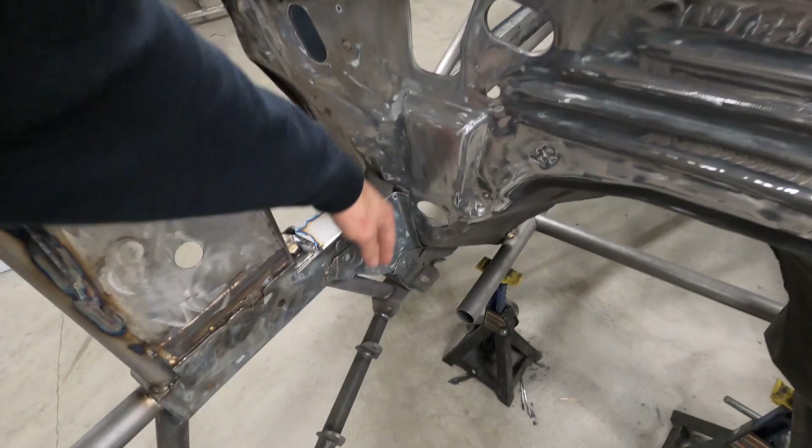I gotta do a couple things beforehand. There's a few spots I gotta weld, and then there's a couple holes that I want to fill, like this one, because the motor plate mount is actually going to sit right here. So I want to fill that so I'm not struggling later.

And then I'm going to worry about the rest of the firewall later. There's a lot of patch panels that need made. Like, we're not using this.

So got a little bit to go on that, but I'm gonna bust this out real quick, and then we will go ahead and get the rear end, make sure it's aligned, make sure it's straight in the car. We kind of did that when we did the 4-link bars, but the car's been moved and it doesn't have a wishbone in it, so the rear end kind of floats around a little bit.

So I'm gonna put the rear end on jack stands so it doesn't move around. I would build a wishbone, but I don't have the Heims for the end. They've been on a couple week back order, so kind of waiting on those. But everything else for a wishbone's here, I just don't have those.

So I'm going to get started on this, and then once I get to the point of getting the rear end lined up, motor plate set, I will start filming more and show you guys what goes into getting the motor set and moving the motor where we want it for what we're gonna do.

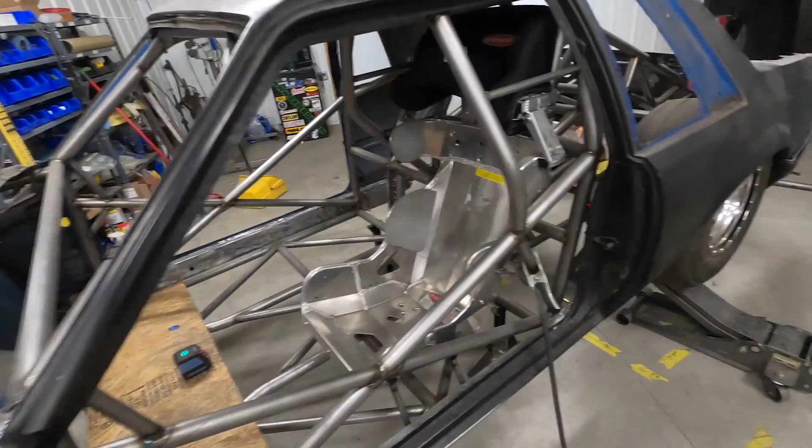It's super time consuming because it is 4 o'clock right now and I haven't even started on the motor plate. So that goes to show you, I didn't really take any breaks. It just takes a long time to fit each little individual piece.

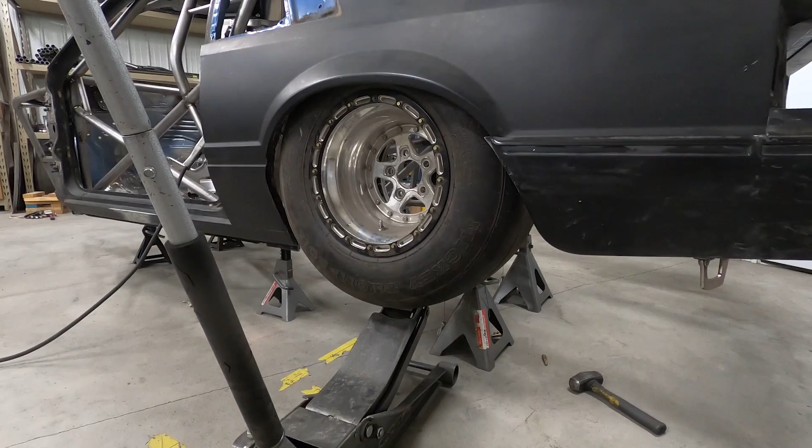So finally got around to the back here. I wanted to make sure the ride height is where I wanted it, and this is kind of what I'm looking at running. To set the motor plates, I need to know ride height.

Like I said, on the jig, this is a lot easier because we can just set the tire on the jig and it's done. But I'm using a jack because I just wanted to see what the ride height is.

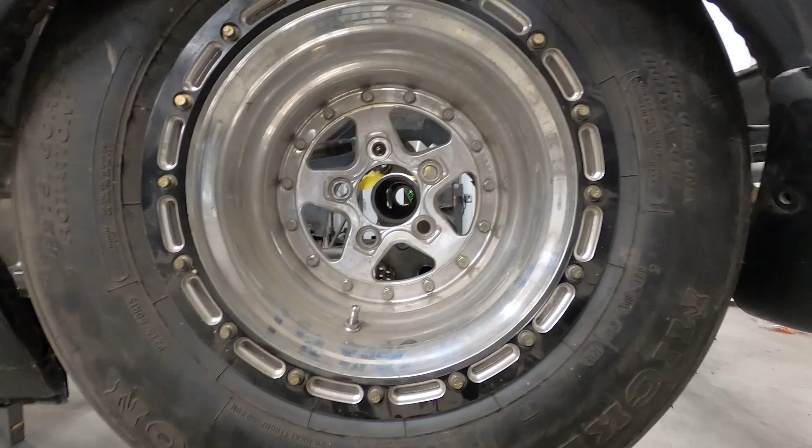So I got the rear end pretty much level. I'm not really worried about side to side, I'll do that here in a minute, but I got this somewhat in line with the axle tubes. So I think that's the ride height we're going to set the motor plates at, that way we can get those set where we need to.

So I'm going to get the rear end kind of realigned because it's just kind of floating there. As you can tell, it's a little off. I don't have this thing perfectly.

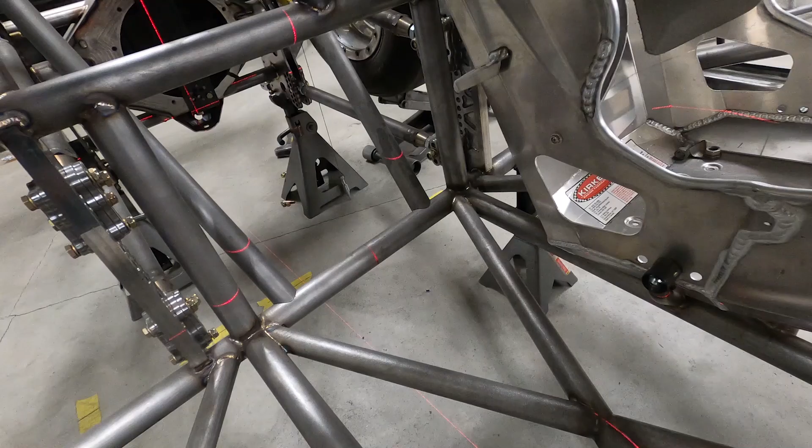If you guys are looking for a good laser, we kind of tried an Amazon laser, and it turned out pretty well. I think this thing's like $35, and it has worked phenomenal. We were going to buy a more expensive one, but said hell with it and bought a $35 one, and it is pretty badass. So it's a little tip of the day.

So I'm gonna get that aligned, and then I'll show you what we use to align the motor plates and all that fun stuff here in a minute.

All right, so got the laser set up. I made reference marks way long ago when we actually built the chassis, so they're still on there. Got that one lined up, and then I have one back there, and one on this cross X right here. So I got the rear end basically right where pinion center is.

So I will go ahead and, I'm probably gonna set pinion angle. Either I'm gonna set pinion angle or I'm gonna take off at least the upper 4-link bars. That way I can let the rear end pivot, because I'm about to show you what we use.

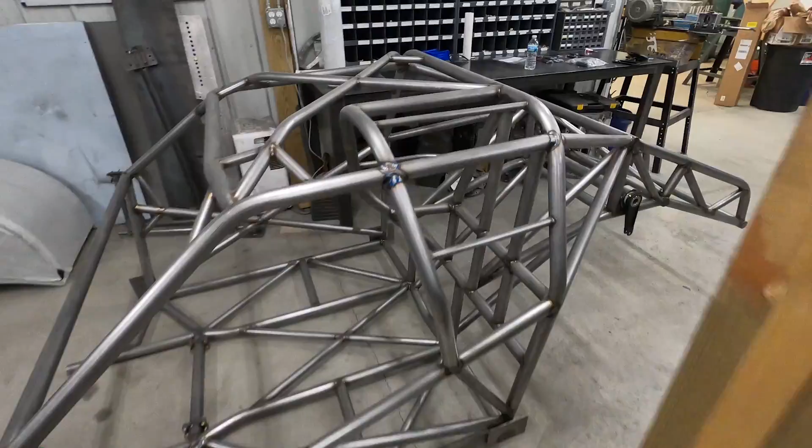So obviously it's an LS motor going in here. We have mock-up blocks over here. I gotta dig them out. So this is all of our mock-up bolt stuff.

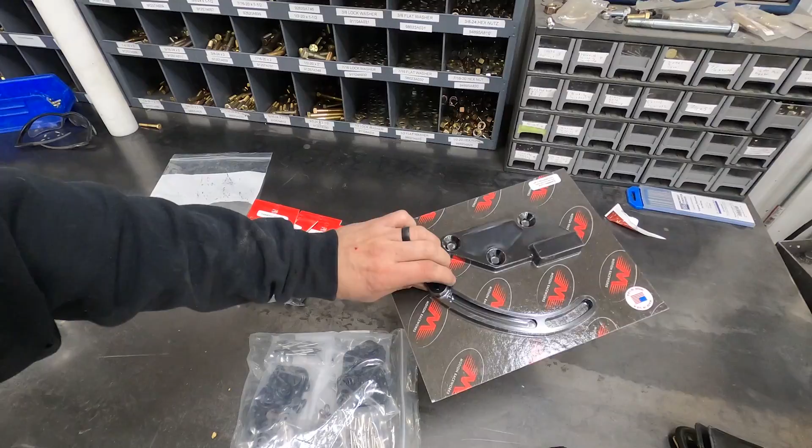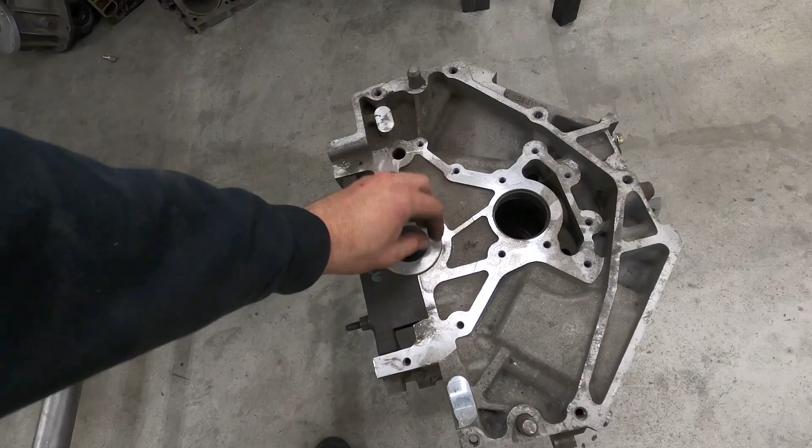So here is our mock-up blocks, and we use aluminum blocks because this is why. We can drag them, lift them. We don't have to throw our backs out lifting an iron block. I had these made a long time ago. I think they're sized to the mains outer diameter, and the inside is actually 1 5/8 inch. So what we do is go over to our tubing and get a piece long enough.

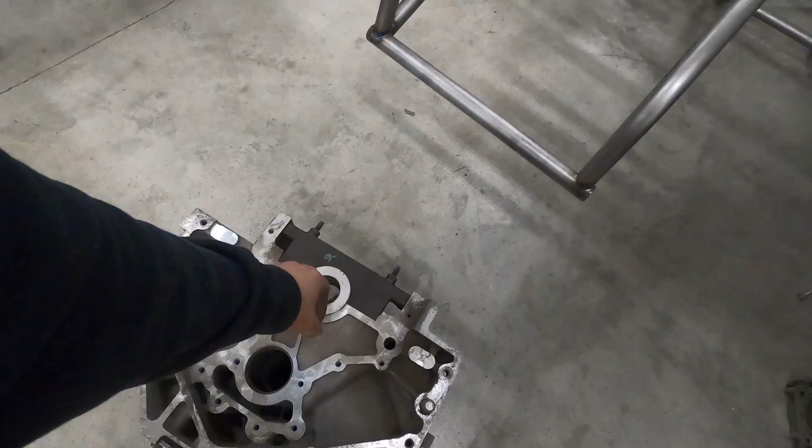To run from the mains of the motor all the way to the rear end. So we'll get a 1 5/8 inch piece and run that all the way through here, and it ends up in our 9-inch third member.

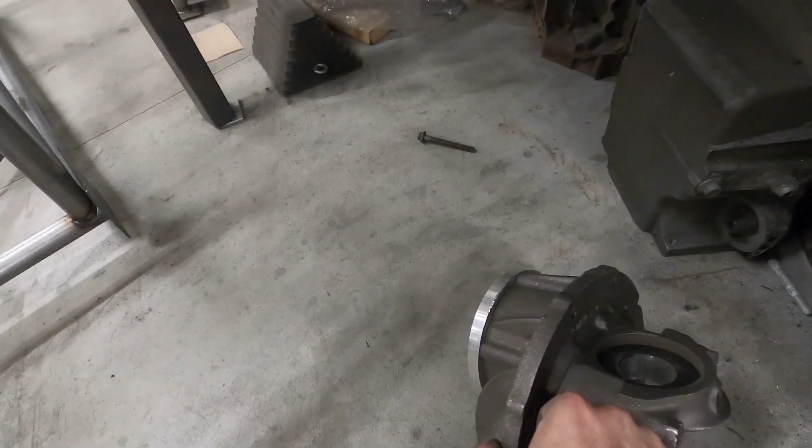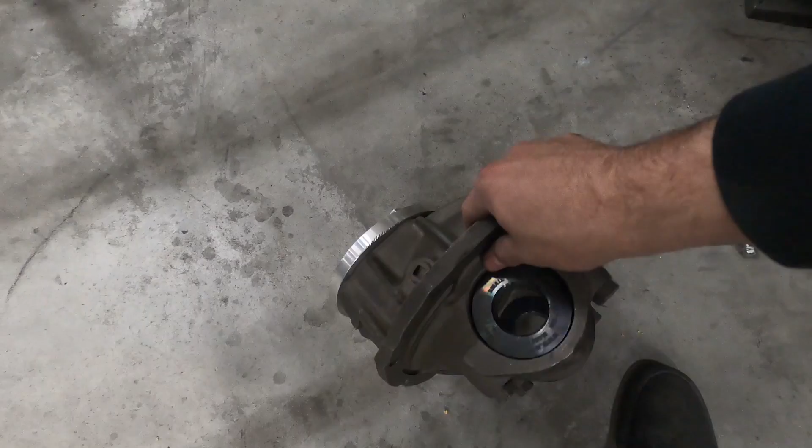It's just a bare third member. This is the same one we used for narrowing rear ends and setting up rear ends, so it still has alignment blocks for that. But on the front, I had this made along with the plates I just showed you.

So this is actually pinion center, and this is 1 5/8 inch. So we'll have a bar running all the way through, and I will show you that when we get there. But I am going to go and

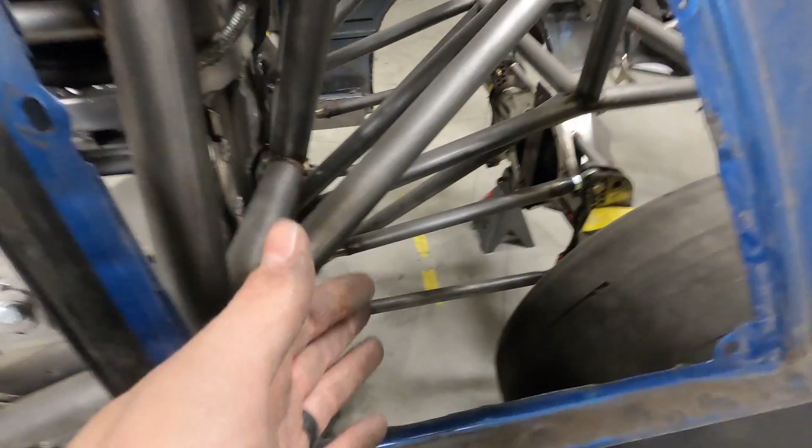align the rear end, get it squared up in the car to the number 1 bar. That way the rear end's not cockeyed. When we stick that bar in there, the good thing about this bar is when you move the motor, you're moving the rear end.

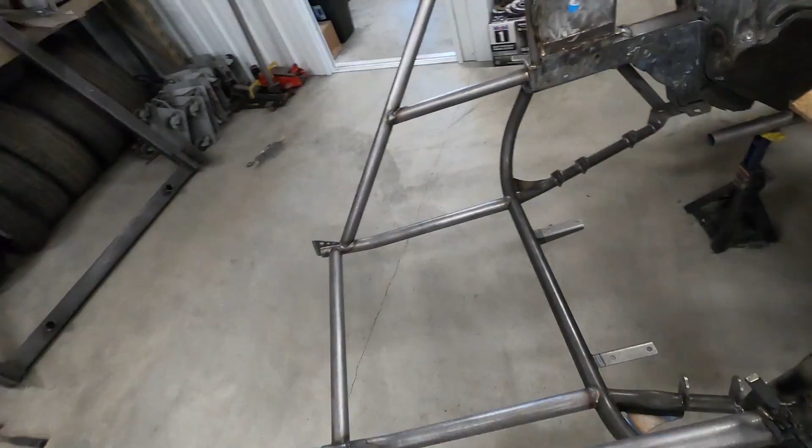So it kind of self-corrects itself, if that makes sense. That way it can sit in here, and you move it this way, the rear end will follow. You got to watch a little bit because the tube does have some bend to it, but that way you don't have to guess. You have a straight bar all the way through. So that's the correct way to set motor plates.

And then from there, you'll set your pinion angle once you get that out. So I'm going to make sure the rear end is kind of straight, and then I'll pick you guys back up. I'll get you guys situated, and we'll get the motor going, get the rear end aligned. I'll pick you guys up in a second.

All right, so I got the rear end squared and centered. I got the third member in, our mock-up third member with the aluminum jig, 1 5/8 inch hole in it. So the rear end is square with the car.

I am going to get the motor set and get the bar run through it, and we'll play with the motor placement once I get it in there. I'm probably going to pull, I might pull the oil pan off the motor to check ground clearance, but I can also just take a measurement. This has a ton of room for oil pan clearance, so I'm not really worried about fitting in this stuff.

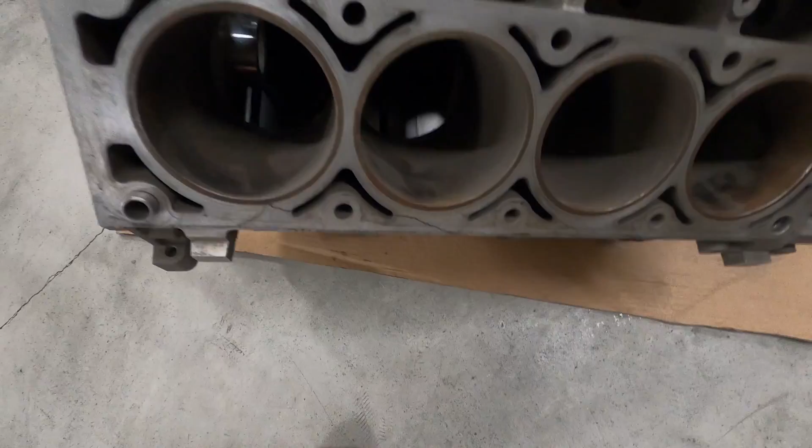Obviously you can tell it's our mock-up block because there's massive cracks and whatnot, and we got one over there that the whole side of the cylinder is missing.

So that's what we use these for. I'm going to get this in the car, probably put it on some type of 2x4, something to get it set right. It's kind of tough hanging it with the engine hoist because the engine hoist leaks down, and you can measure something, then 5 minutes later come back and it's sagged a little bit. So I want to make sure things stay where they are. I might get the transmission jack over here so I can adjust it and whatnot.

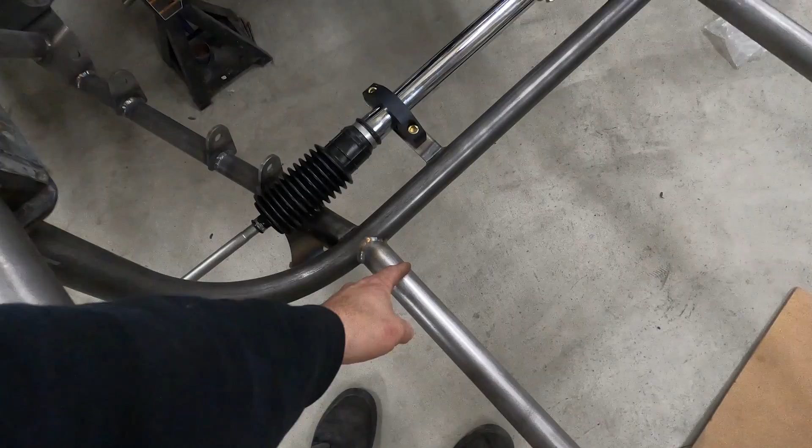So I went ahead and put the oil pan on it just because I want to check clearance on the steering rack, because this is a Racecraft K member. Obviously this one is going to be cut here, with the 2-bolt or 4-bolt flanges. So I believe it moves this one in front of the steering rack. The normal K member is back here, I believe, something like that. So I know this is going to be kind of close, but it'll still allow us to take the oil pan on and off, so if you're at the track and you got 3 rods hanging out, you can change them and keep racing, that type deal. So I'm gonna get this up in there, and then we'll go from there.

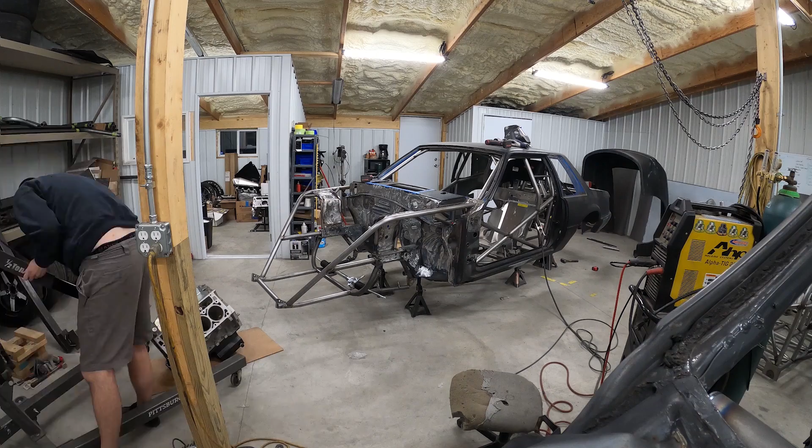All right, so I got the motor in there. I got the tranny jack under there. Probably gonna support the back of that, and then I'm gonna stick some 2x4s under here to get it set, kind of get it where I want, at least semi mocked up.

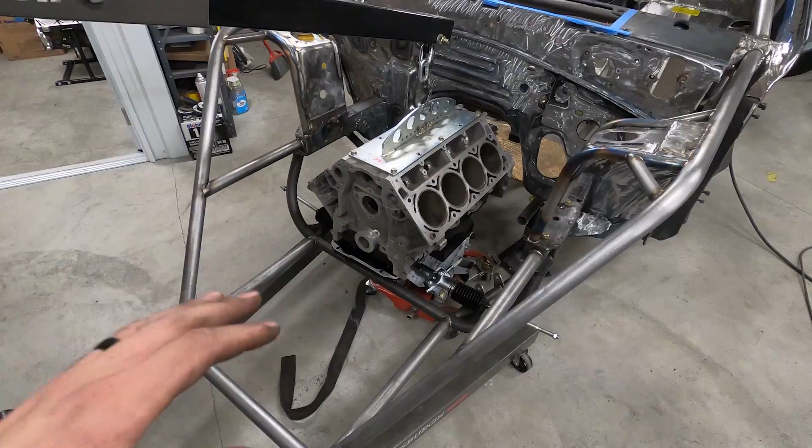Shout out. So I'm gonna try and explain what we do as far as motor placement, crank center line, that type stuff. So I am going to measure.

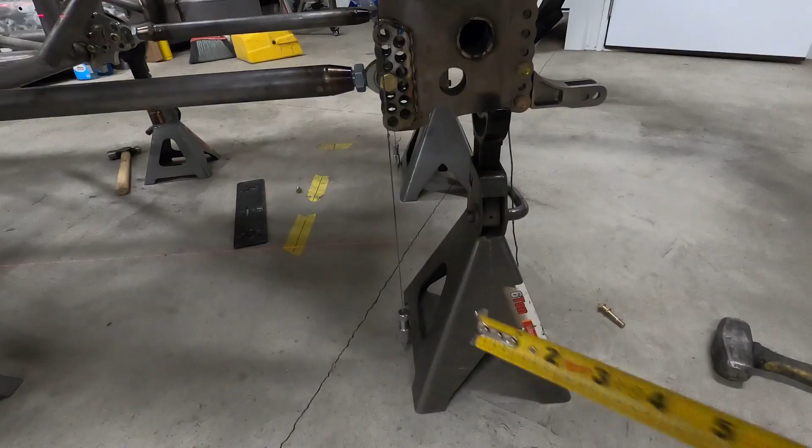So we're looking at, let's see here, like 25.25 to the center of the axle housing. So that comes out to be, so 25.25.

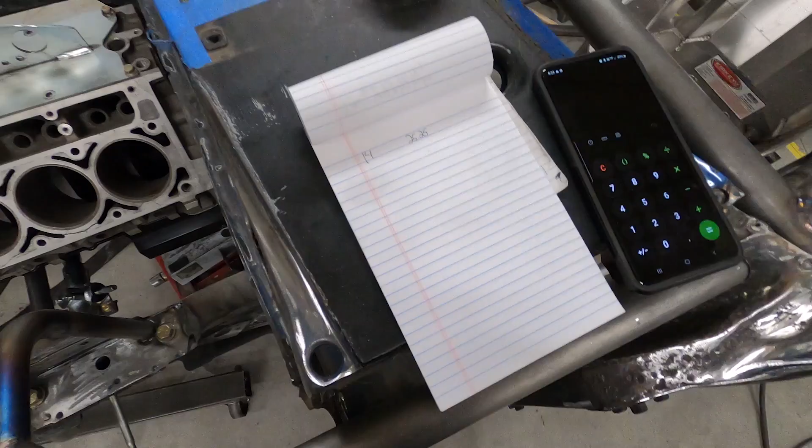Let me grab some paper and I'll kind of show you. All right, so we had 25.25 back there. We're gonna be running a 28-inch tall tire most of the time, so we're gonna set the car up for 28s. We will be running 26s, but most of the time we'll be on 275, so we'll just adapt to the 26s. So we got 25.25, half of 28.

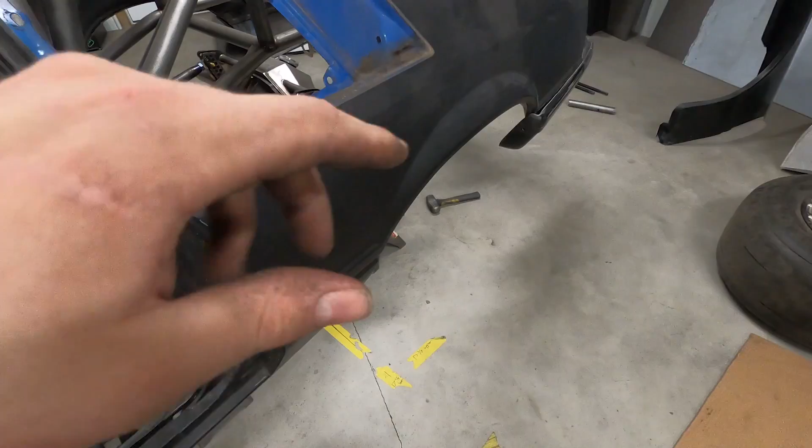You got 14. So 25.25 minus 14, so it's 11.25 from the center of the axle tube to the ride height that we're going to be at. So that's kind of what we're going to be looking at here in a second. So I'll write that number down so I don't forget it, because I'll forget if I don't.

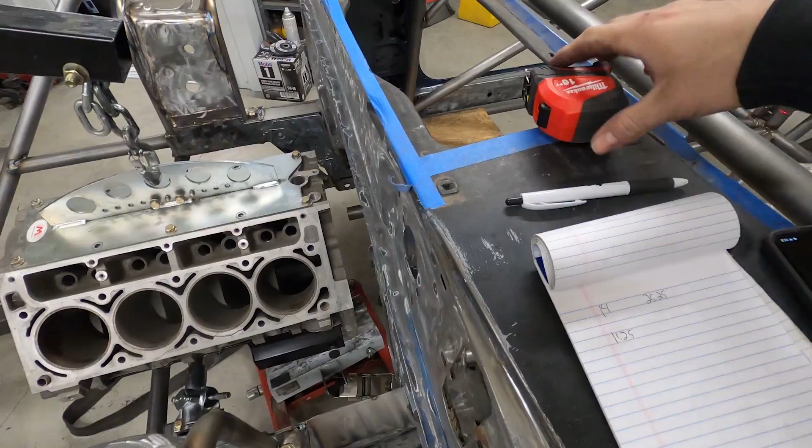So we got, looks like right at 22. We're gonna just do this for the sake of measurement. So 22 minus 11.25, you'd be looking at a 10.75 inch center line, which is really low for this. We're gonna be doing, this isn't a radial car. We're not gonna be doing high horsepower. We're mostly gonna be doing like small local grudge races, some no prep stuff.

So basically wherever we can fit in, we're gonna race. We might race radial in some class, which for us budget people is not possible. But yeah, that is where it's at currently.

So obviously it's going to come up from there because I don't want it at that. Probably going to shoot for like a 13-inch crank center line. Let's kind of see what that looks like. I'm going to bring this up a little bit. Let's see what this is at now.

We are at 22.5. So that really only raised a half inch. Well, so we're at 11.25 now. So got a little bit ways to go.

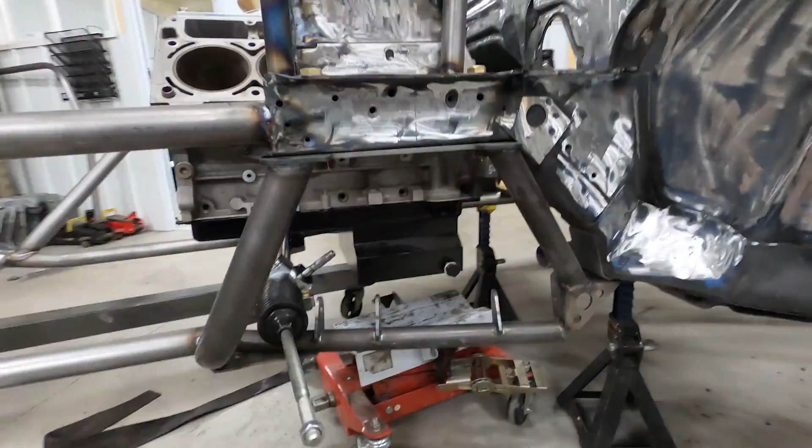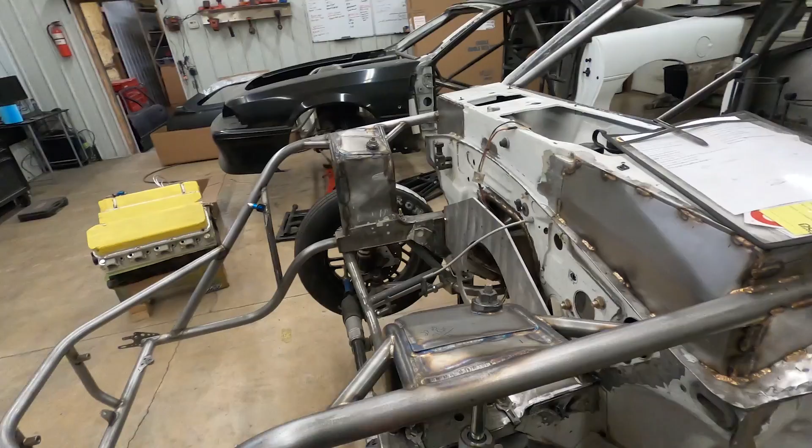I guess we could walk over to Mike's car, because we set his up for street type stuff. Well, we got the motor out now, but we set his back pretty far. His is set back without touching the firewall, about as far as it can go.

So I don't know if we'll do that. I kind of have to think about where we're gonna have weight in the car. Now that we're gonna be putting the radiator in the front, we're gonna have a lot more front nose weight. So the rear's gonna have a fuel cell, but for regular racing we're not gonna run a fuel cell, so there's not much gonna be in the back.

So really this motor probably needs to be where Mike's is. We're not gonna, like I said, it's not gonna be a radial car. We're not gonna have a 60-40 weight split. I'd like to be pretty balanced so we can add weight where we need to.

So I'm gonna play around with this a little bit, and then I guess I can show you guys the tube we run through there. So I'm going to measure this, get a tube cut, and show you where we slide it and what it looks like.

All right, so I got the engine 5/8 tubing stuck all the way through there. Obviously you can see it goes through this main - hold on, there we go - goes through that main, they are bolted in, I do have main caps on there. So it goes through there, and then all the way back to the rear end housing.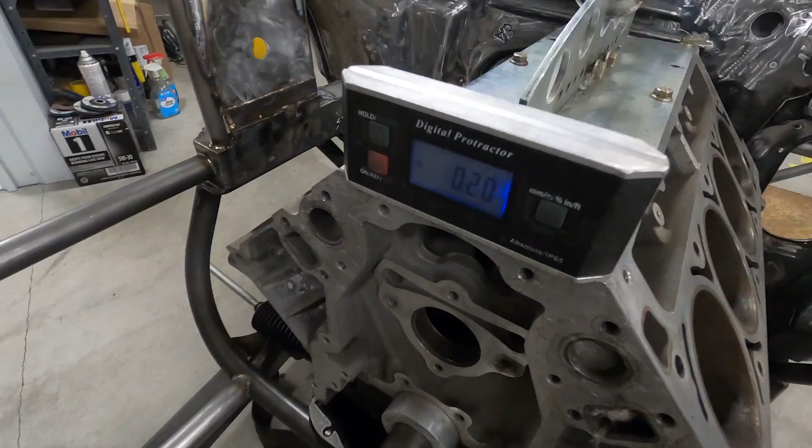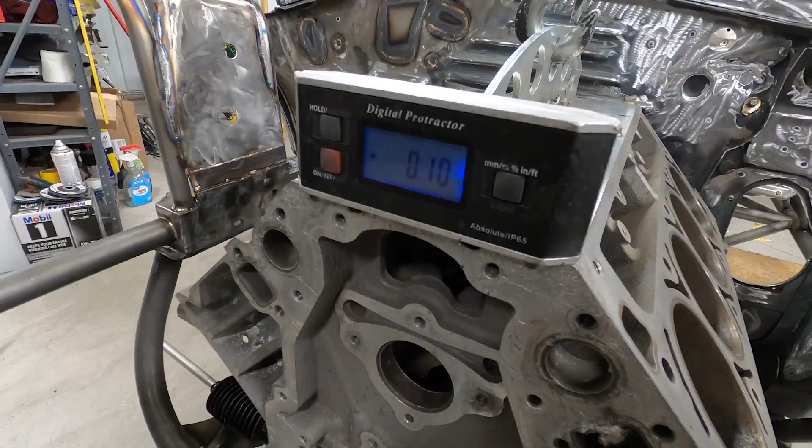So you're looking at 1/4 of a degree. Even if I bump this a tiny bit, barely putting any pressure on it, it's 1/10 of a degree off. So that got me pretty close. It only took me a couple minutes to get settled.

I just have to make sure the pinion in the rear is parallel or perpendicular to the bar. The only way I check is I turn this, and it doesn't bind, which tells me it's free in the rear. That plate in the back is probably 1.5 inches thick, so if there's any pinion offset from the tube, it'll pinch the tube and I won't be able to spin this by hand. That's kind of the way I set it, so I can get pinion roughed in.

So where it's sitting right there, that's pinion, that's 0 degree. There might be, you know, 1/4 of a degree up or down just because the tube isn't perfectly in there, there's a slight slip, but at least it gets me in the ballpark so I can go from there.

Now I can grab my plates. So obviously these are ours, I do 1/4 inch aluminum on all of our builds. I'm not a huge fan of the 1/8 inch stuff in the back.

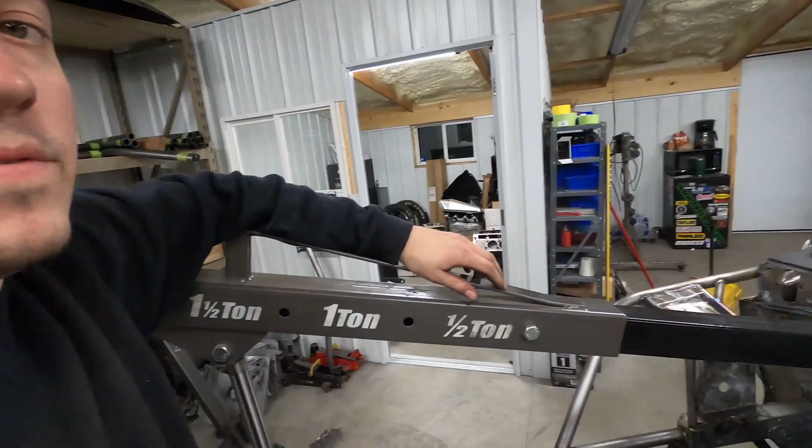Now that I got this all set, I'm actually going to start cutting the motor plates. There's not much else for me to do, I'm going to double check the side to side.

Side to side is kind of iffy because the frame rails in these, that's just the only way to put them. There's really nothing you can go off of. Even like my tubes, if they're off 1/4 inch, my measurement side to side will be off. So even if I were to go across here and measure side to side, it wouldn't be the true chassis side to side.

So I do have the laser, and I'll probably use that to center it side to side. That way I can just run it down the tube and see which side the laser's on and if I need to move it. That's about it. I'm going to probably get the motor plates cut and measured, cut, and then we'll kind of go from there.

So I did forget to mention that this car is a center pinion car, it has no offset on it. So everything I'm doing is because I know the car is centered, if that makes sense. So like this mid plate, I'm just trimming off.

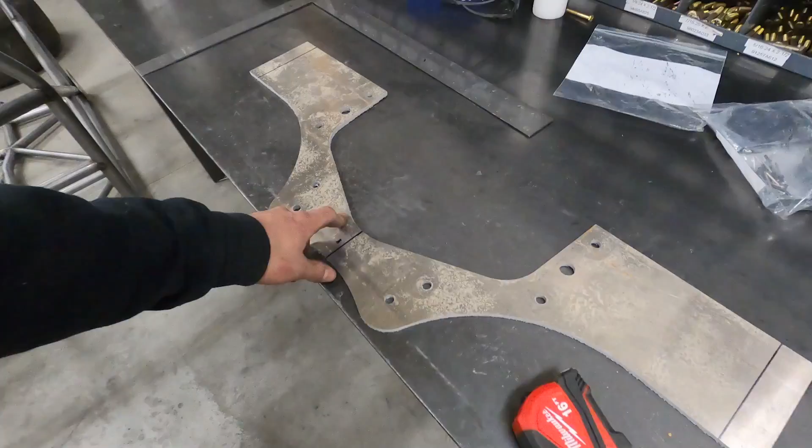I just went over there and measured between the frame rails where the motor is about sitting. These don't have to be snug up to the frame rail, you can have a little bit of a gap so you're not fighting it back and forth to get it in there.

So this I know is the center of the car, this is the center of the motor basically. So I'm cutting off equal amounts on each side, and I'm going to do the same on the front plate because, like I said, I know it's a center pinion, so there's no offset.

Everything is even, so this kind of helps align the motor also because I know I can stick this in there, and this is only going to have a 1/16 inch gap on each side, so it's going to center the motor too. I'm still going to do measurements, but it still tells me about where it's going to land.

All right, so it's Sunday afternoon. Had to do some chores, hang out with family, you know, the grown-up stuff. So I got back out here, got a little bit done.

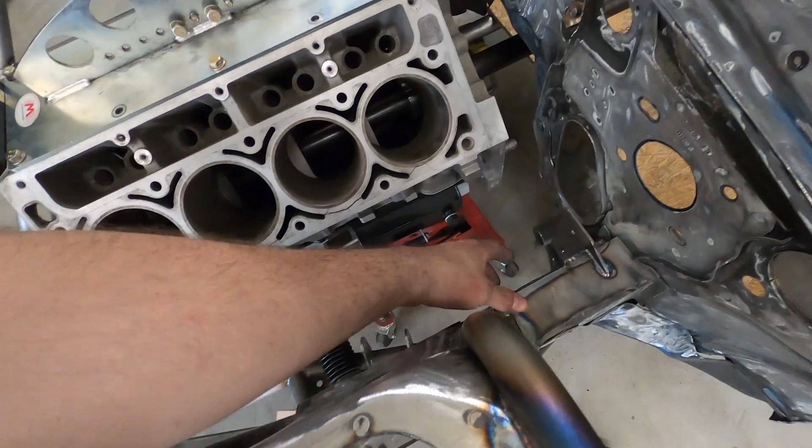Got the motor plate cut down last night, and then I got the plates for the mid plate tacked on. I made these, they're just little 2x4, just to beef up this frame. This is pretty thin stuff here, so I beefed that up a little bit, then made these, they're just 1/8 inch with 2 holes in, 2 3/8 holes. Got one on the other side. So I got those, and then I took a scribe and marked the holes.

Got these drilled out, so the mid plate's pretty much done. I'm just gonna set it back on the car and then work on the front one. So the rear's done. I'm gonna weld the front side and the back side - actually just the front side, because I can't reach the back side with the motor in it. Once that's done, I'll get the back side and go from there.

All right, so we're back out here. Mark's doing some carbon tub things, making the fun templates. These pretty much just fit on - basically recreate a tub, but in cardboard, way less expensive than a normal tub. So he's gonna get that fit up.

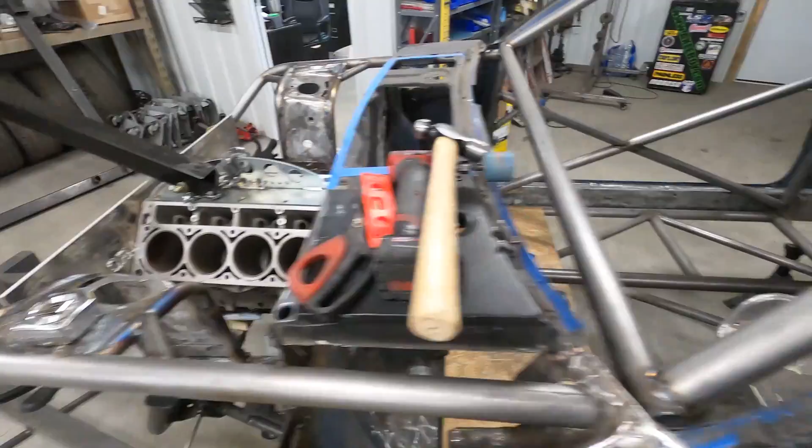I'm still working on the front motor plate. I know I kind of left you guys hanging this weekend - I ran out of time. So I'm just finishing this up, and then probably gonna do the transmission mount this week, get that wrapped up.

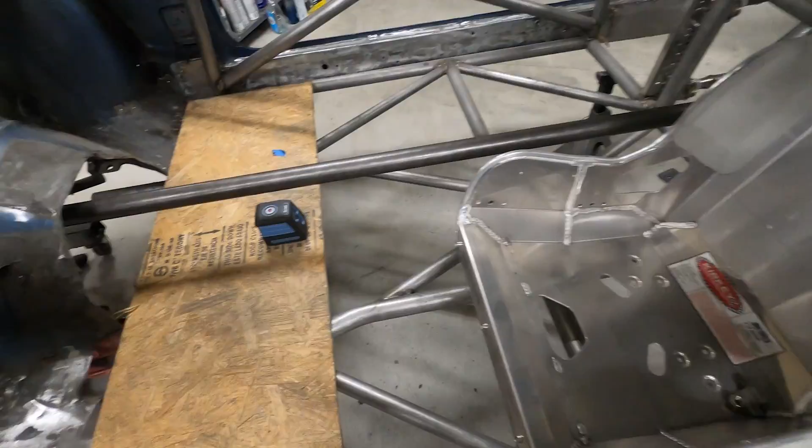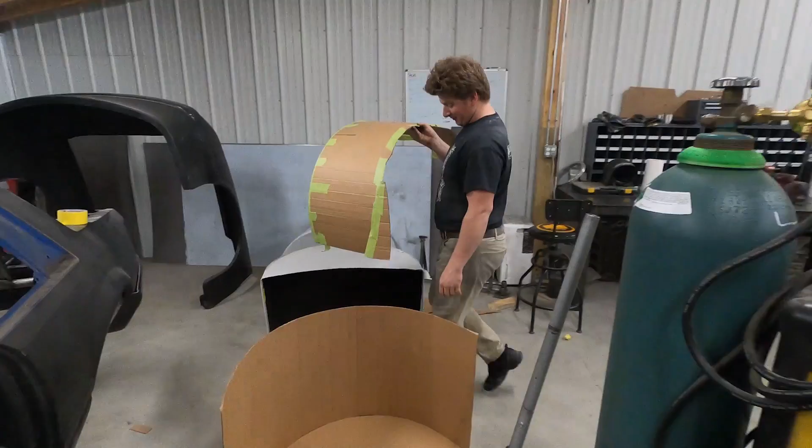I think that's about it for tonight. Hopefully Mark gets both tubs fit. Not tonight. Maybe this week. Too bad all these templates we're making don't fit. Yeah.

Well, there are other backups. Yeah, not for me. Yeah, it's the problem with having tons of different back halves and rear section styles.

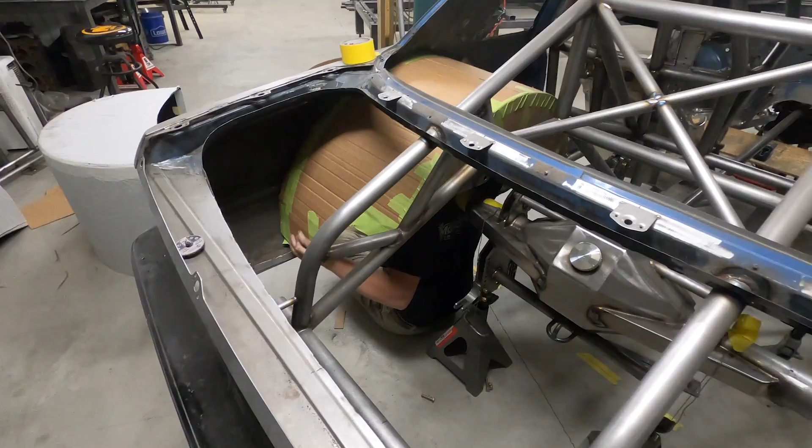So basically this is the concept - basically just make it fit the inside. The inside's kind of the tough part because there's all these different weird bumps and lumps, and making those fit is kind of tough.

Does that one fit pretty well? It's not bad, it's pretty good right there, but I don't know if that's where you want the top of this one - you're at the top of the window. Oh okay. I don't think you could go any higher unless you notched out for the window, which we don't want to do. Yeah.

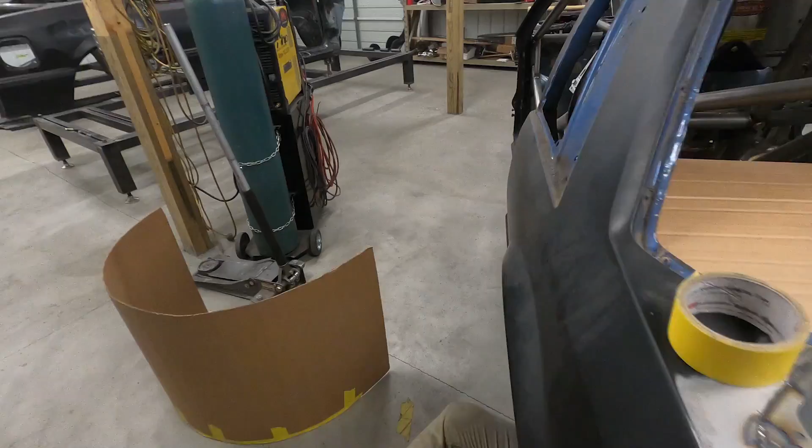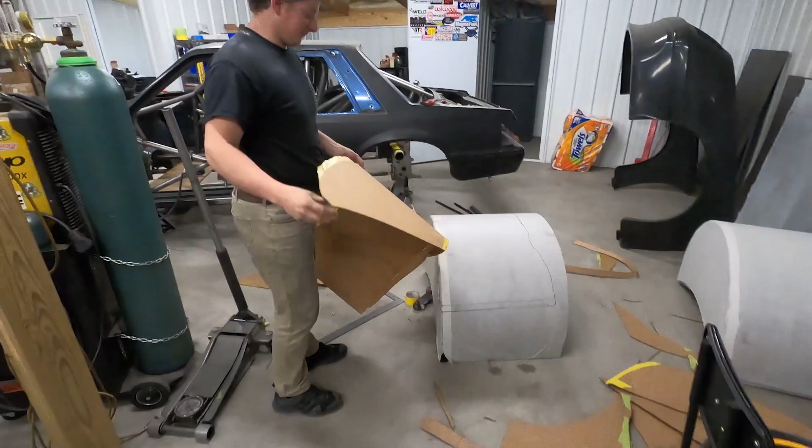All right, so Mark's going to show us what he does to fit some carbon tubs. Yep, so I just cut it a little short usually, as close as I can, just eyeballing it. Then I can get it up in there and get it level, and line up whatever I need to line up on this side, because this is where you're going to rivet it on - this is kind of the important part. Then get it up in there, get outside, look at it, make sure everything's level all the way around it. Then I tape it up where I need it, using tape along the edge out to the body, going around it as best as I can.

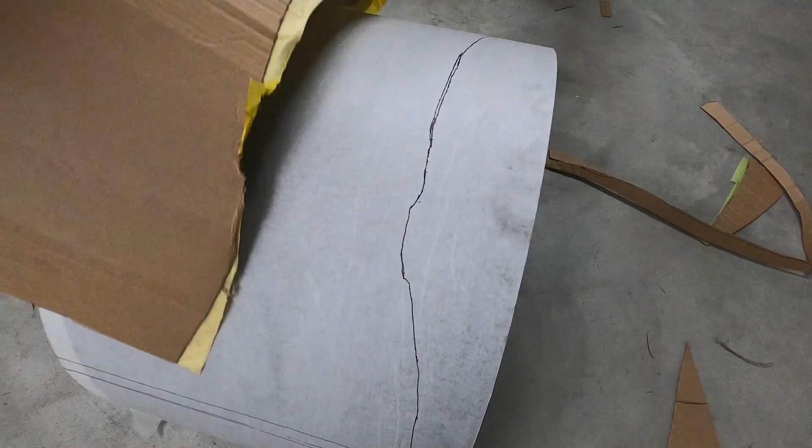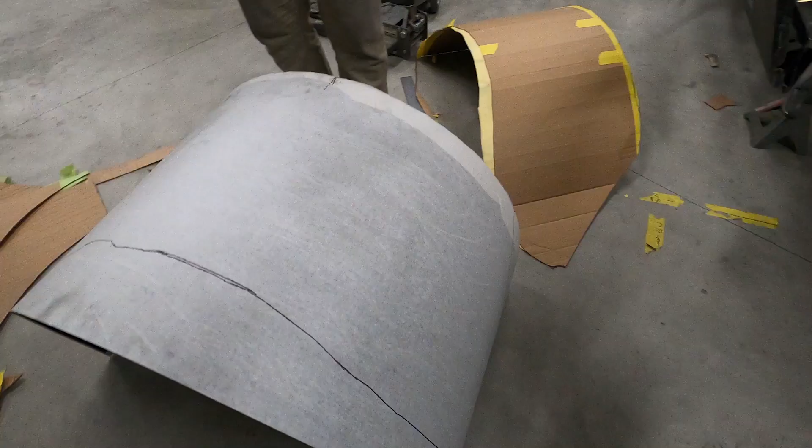And then I'll just set it on the tub and outline it, and then get that. And then you do it wrong the first time because it's in the wrong spot and you don't have enough on the other side of the tub, so you redo it, and then it works. But yeah, that's pretty much the gist of it. Then I'll take tin snips, because it usually cuts the carbon the best, and just go close to my line. Then I'll take the drum sander, get it up to the line, and start fitting the tub, and wherever it hits I'll take a little bit more off until it pops up into place.

It's like arts and crafts over here. Very much like arts and crafts over here. Cardboard and tape everywhere. To be fair, that's part of an old tub too, so. True, it's part of an old tub.

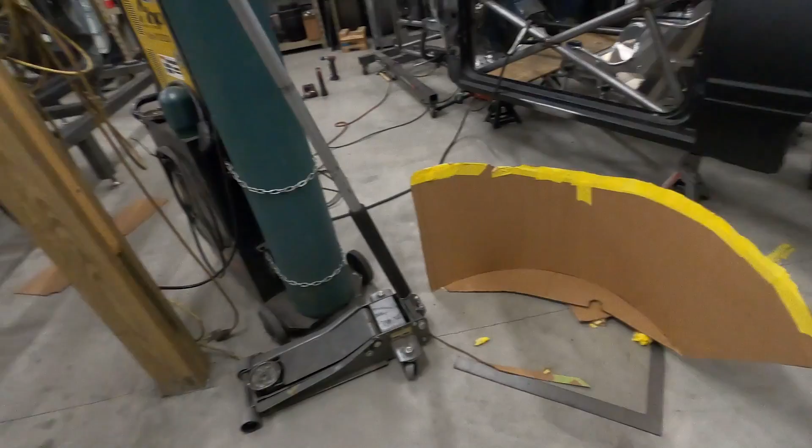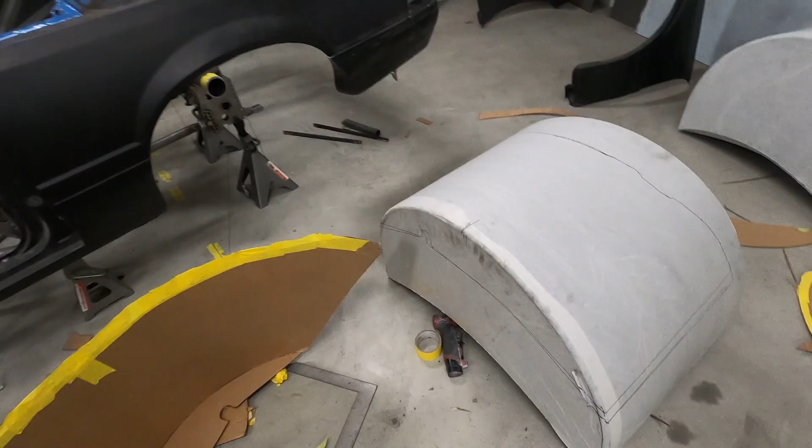That's the process - and then just be brave and cut into your $500 tubs. And use a quarter of them. Literally. Yeah, so all this is pretty much gonna be scrapped.

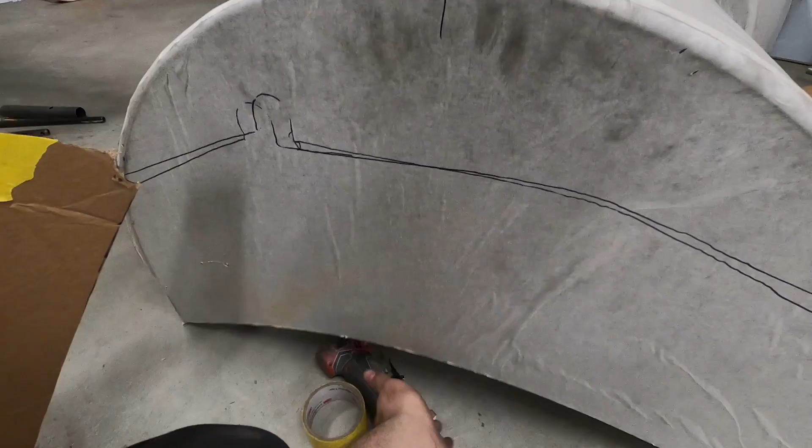Yeah, because it's too thin to use for very much else. Yeah, we could maybe use this stuff. I don't know, this is thin. A drum - you can use it for a drum. Yeah, good, that'd be a pretty cool drum set. Yeah, just carbon fiber.

Yeah, pretty much just goes in the little trash bin.

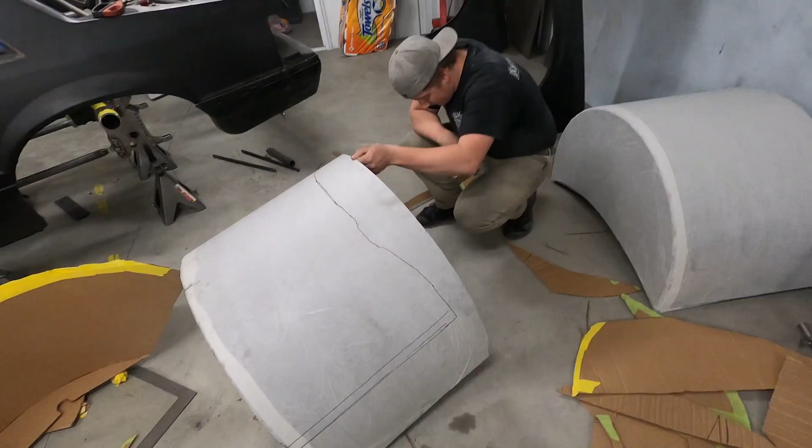Gavin's gonna show us some tube bending expertise here. This is our most complicated main hoop. It's got 8 bends.

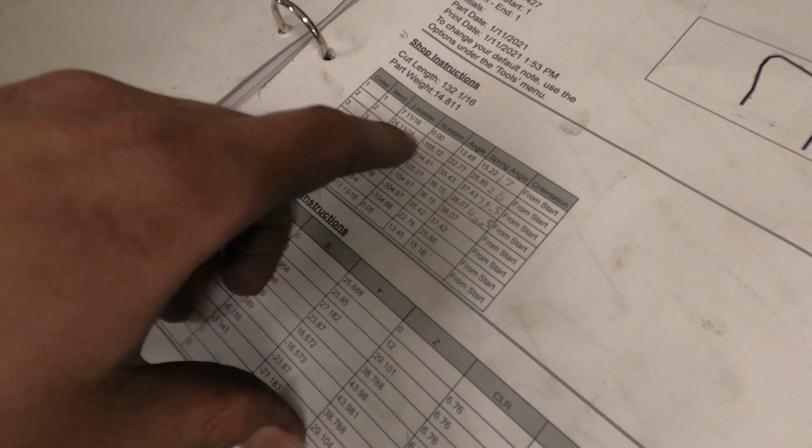This is for the S197 8.50 and 25.3 kit, so it's got a ton of different bends. This is the printout sheet we get from Bend-Tech. It shows your cut length, and then each bend has its own location, rotation, angle, and spring angle.

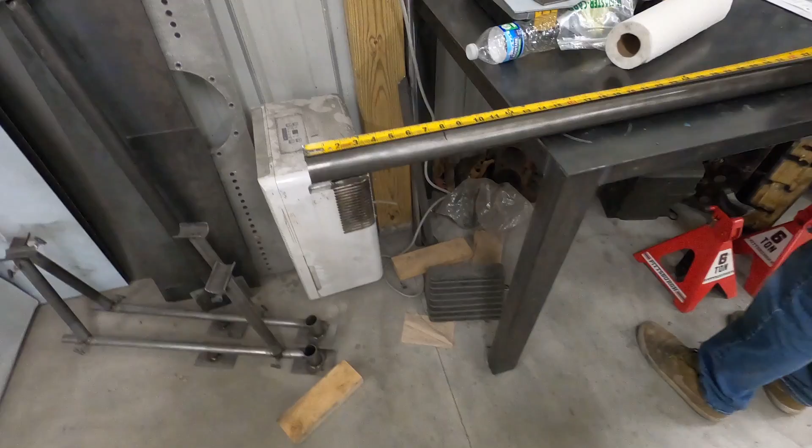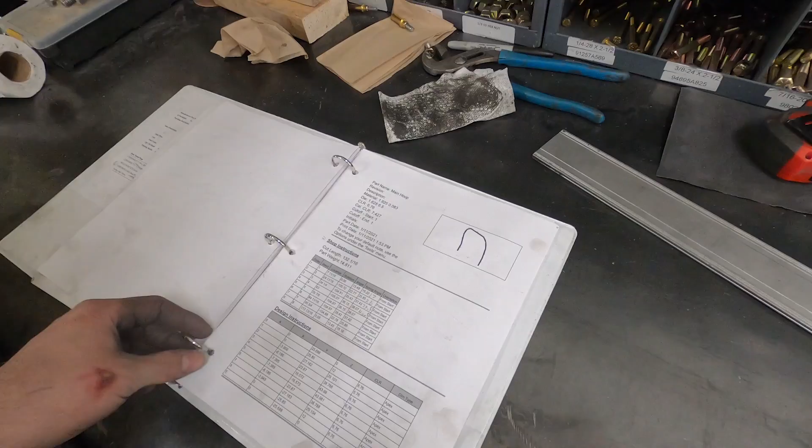So it's about the most complicated one to do. Gavin just loves doing these. Basically he's just going along and marking each spot where the bend needs to be. This one's a good one to do right before lunch when you're hangry and just want to throw it. But you already messed it up once.

And the numbers are not easy numbers, they're like 38.07. Luckily I already cheated and marked it down where it needed to be at, from the last time we had to do it.

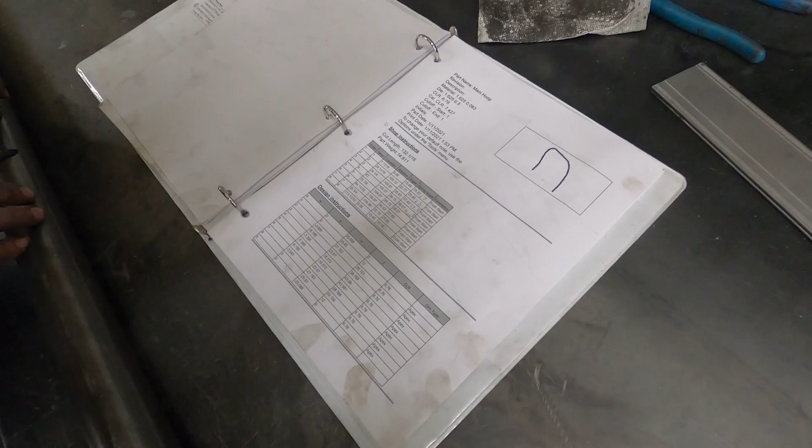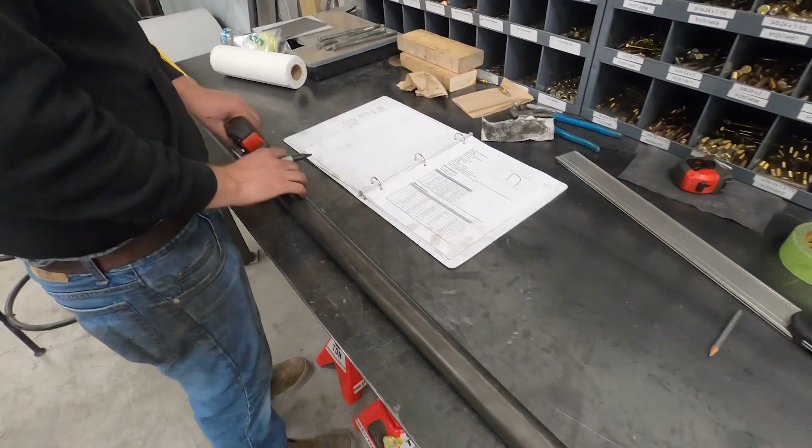So those need to be put into Bend-Tech. You'd have to adjust the spring number. I don't know, just write it down, it's easier. That depends on the tubing you get too. Chapparal's bends spring back a little bit more, and then the other stuff springs back a bunch.

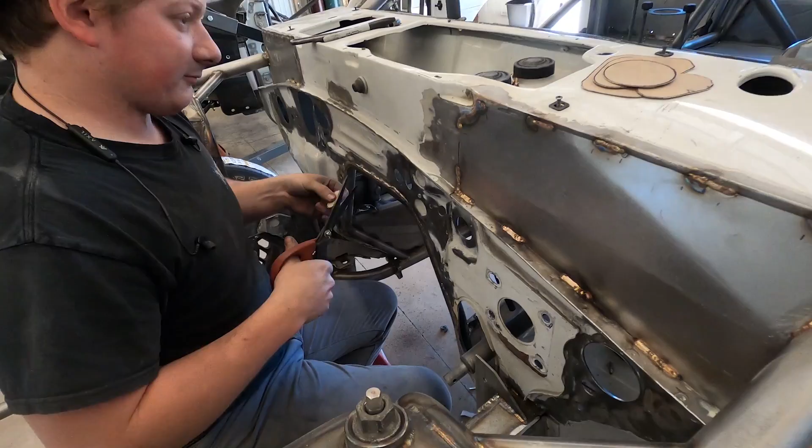I'll show you that after lunch. Gavin's over here, or Mark's over here, making templates for all of the holes, there's lots of holes. We just did this on the shop car, so we thought the templates would work.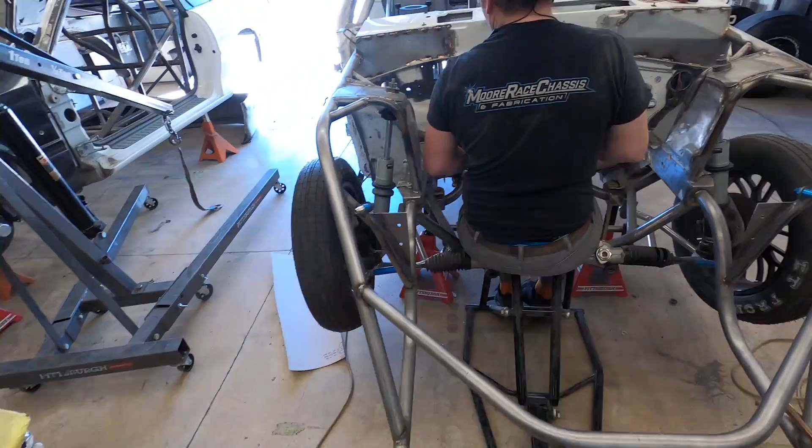So we thought some of these templates were gonna work, but this had a welded plate on the back of some of these. It was literally just 1/8 inch steel someone had welded on there, so it kind of ruined our templates we already had. Now he's got to make all new ones.

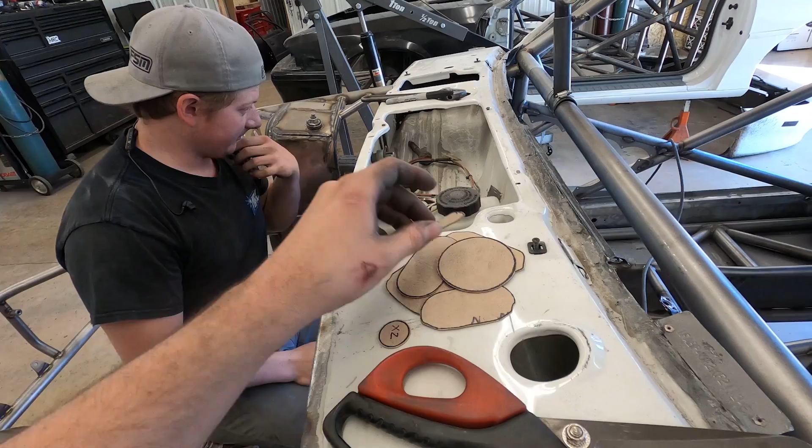Got a collection going on up here. These take forever because each one's different. You've got to cut all of these out, and circles are not easy to make at all, because of course they're not the size of a hole saw. Why would they be? That would be too easy. They're probably metric.

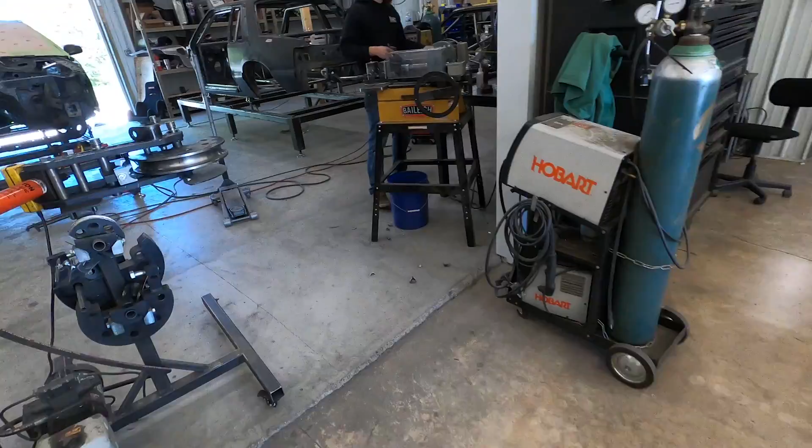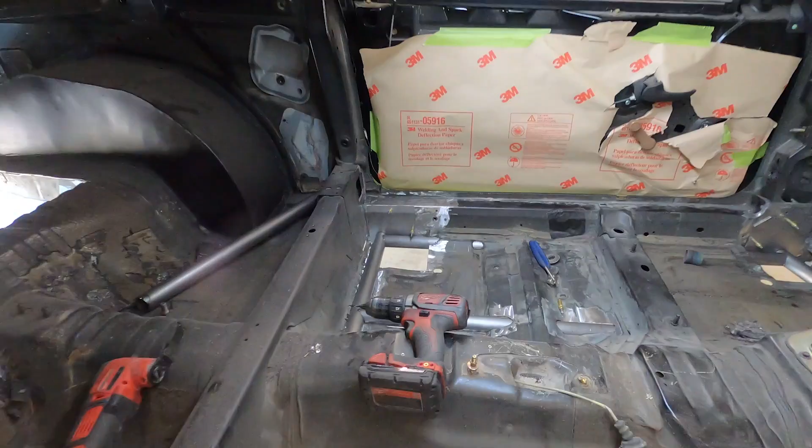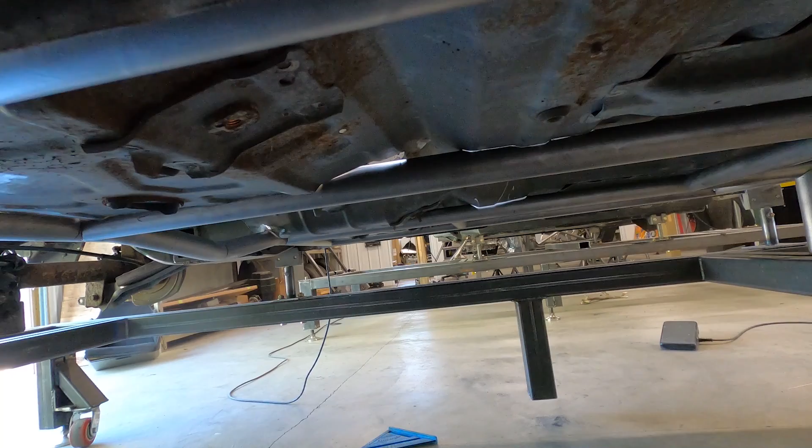I've been working on Jason's car, on the floor structure. Getting the floor structure fit into the floor takes a little bit of time, so it's coming along. I just have to do, normally a number 9 bar, the one you see on the other side, isn't needed on the passenger side, but we always add it just for added strength. That's what I'm working on.

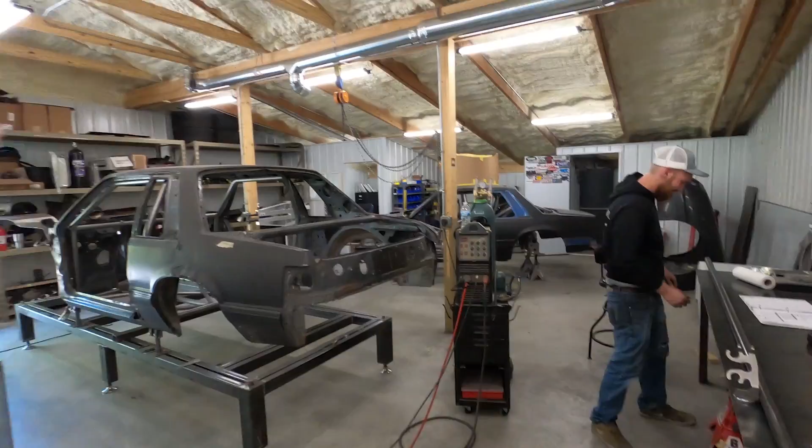Because what happened to the other one? May have forgot to rotate it. Just a second, Ben, it's all right. He just goes along with 0 degrees. I mean, it works for the other main hoop, so I don't see why it wouldn't work for the one that has 8 bends, right? It's fine.

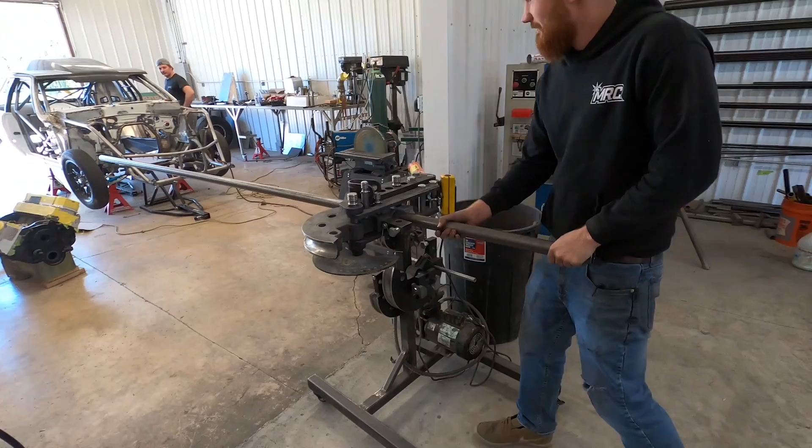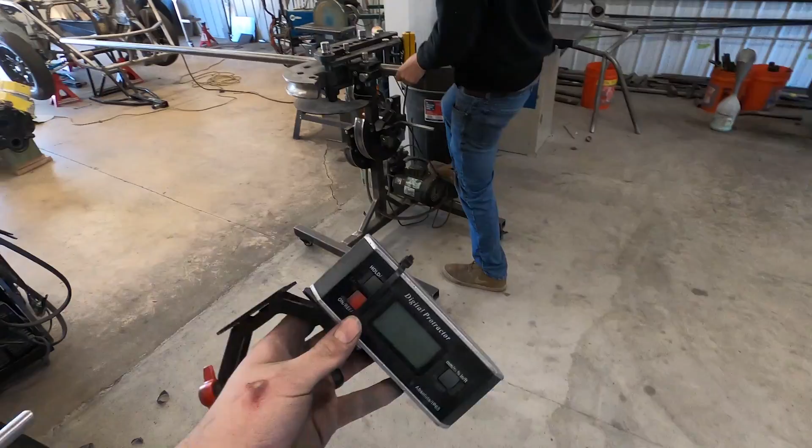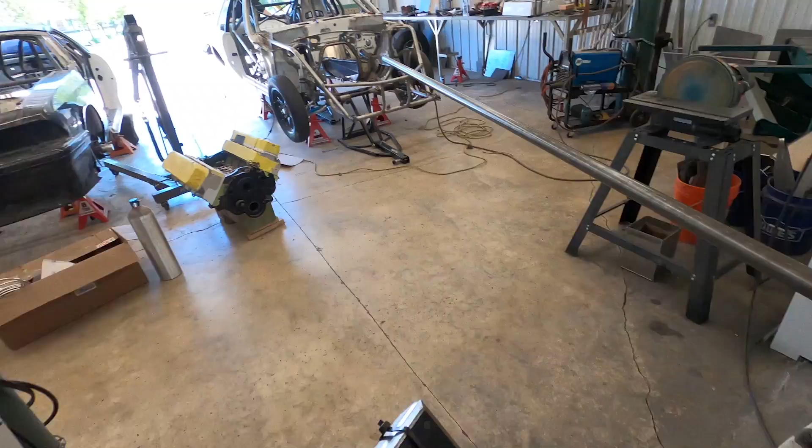Basically just sliding all the way through to his first mark. And then, luckily, I really remember what I bent it to from last time. You're getting good at him now. So then basically we just use this to put on the end of the tube to get the rotation right, but this thing's getting really mangled just from getting tightened down, and if you get a bend too close and it sucks it into the bender, this is what happens.

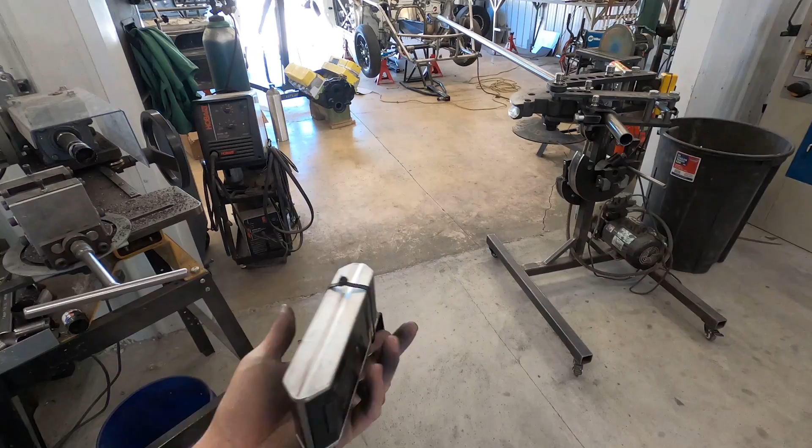So it's almost time to retire this one. It worked, it's like completely spread out. Hey, I grew an attachment to this thing. You can hang it on the wall. It's a love-hate relationship.